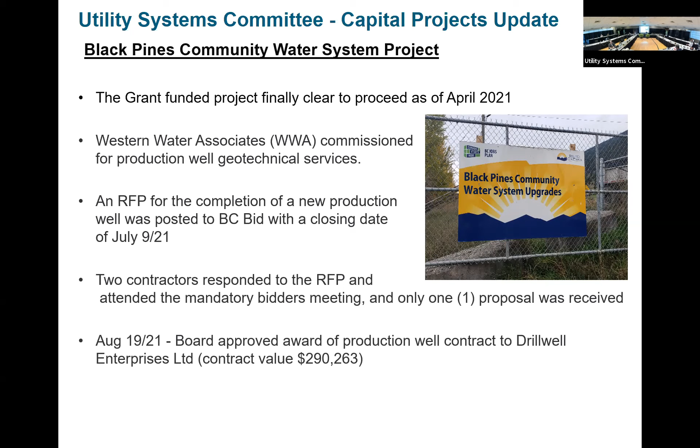And the board approved the drilling contract on August 19th for $290,000 and change. So the gravel pad works, we did some expansion on that working area in behind the transfer station. That was just completed on October 8th. And as we speak, drilling is ongoing on the site. I think we're down between 100 and 200 feet at the moment. And that'll be ongoing with production well testing following the drilling. And we expect that to be completed in November. So it's nice to see this moving here.

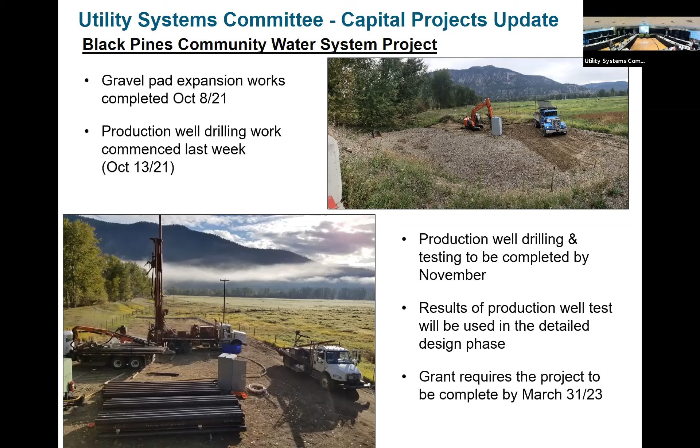Once this is done, we'll use the results of this production well testing to complete the detailed design and then move forward with a construction contract for the rest of the infrastructure. And this entire project needs to be completed by March 31st, 2023. That's the end date for the grant funding program. Any questions on that?

Next big project, of course, water metering program, which we've been working on for a number of years now. This project is nearing completion. Last count, we were at 1,014 out of 1,050 total meters that will be installed. And part of the reason we're not quite there yet is the delivery of the final batch of meters is being delayed as a result of the world microchip shortage that's happened as a result of COVID-19. So it's impacting the supply chain for those specific endpoints that communicate to the cell system.

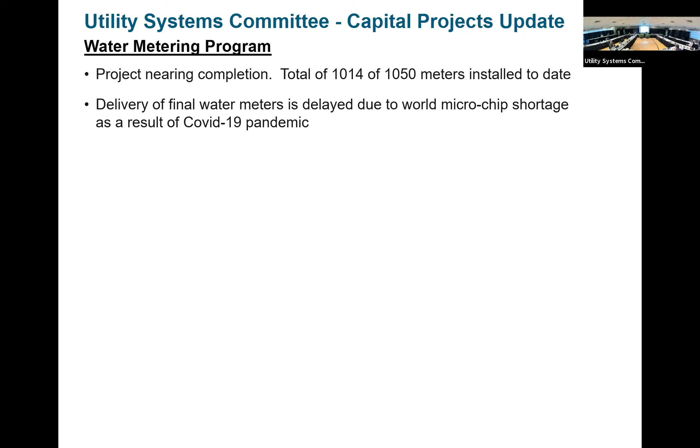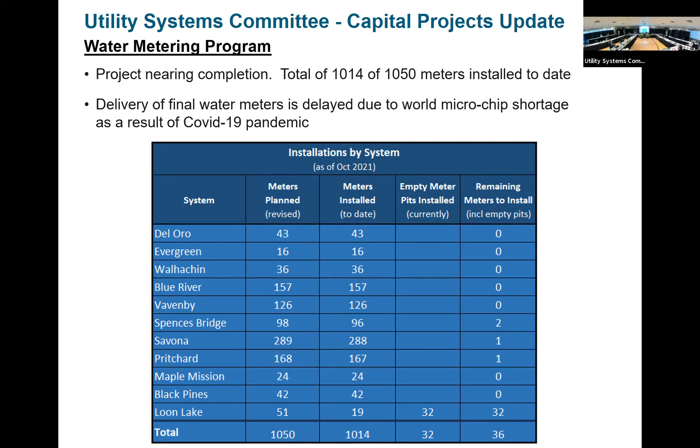This table here summarizes the meters planned. This number is slightly adjusted from the original when we started this project, but it's pretty close. So 1,050 is what we expect at the end here. And we've got 1,014 installed, as I mentioned. There are 32 pits installed in Loon Lake that are just awaiting the meters to be installed. And so those are the majority of the batch that we're waiting on shipment from the factory. I should say the contractor is waiting on. So that's the metering summary.

Good news on this front is the initial strategy, you may recall, I've talked about this in the past, was we had hoped to put about 70% of the water meters in pits at property lines, because that's certainly a preferred location. We don't need to have an appointment with the homeowner to go inside to do the installation, and we can easily access for maintenance or repair. So as the project's gone on, we had a contingency fund in the budget for this project, and things have gone quite smoothly. So we've been able to start digging into that contingency and increase the number of pits that we're installing, because of course the pits cost about 5 times the price of an inside installation.

So, Mr. Devlin, could you answer a question from Bill? Sure, absolutely. Go ahead. Yes, thank you, Chair. I just was wondering on Maple Mission, I see they got 24 out of 24, which is good. Are those all pit type meters? Yes, they are. Thank you. Go ahead. Okay.

So as we've been able to increase the number of pits, we're targeting right now at the end of the project, we'll have 83% of the meters installed in pits or manholes, and only 17% inside. So that's really great news from an operational perspective, certainly.

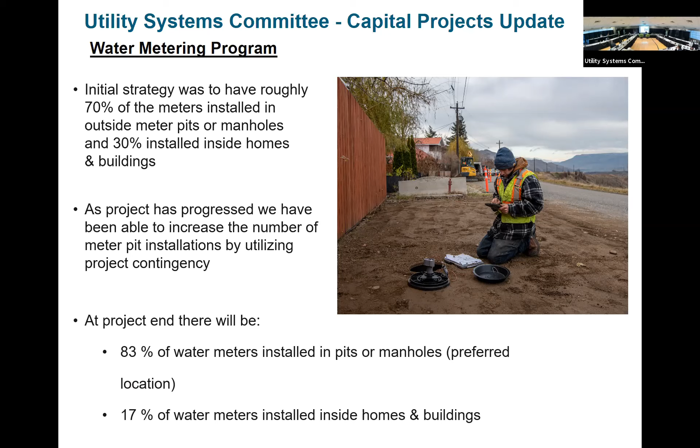The substantial completion date in this contract was June 20 of this year, 2021. Obviously, the pandemic has caused some delays, and as I mentioned, the delivery of the last batch of meters is delayed as well. But the good news is we're a little behind schedule, but we're well under budget. So we're really pleased with how this project has gone.

Mr. Quinn? Thank you, Chair. Through to Jake. Some of these things have got a time frame that they must be completed by. Is the water meter project one of them?

Yes, the completion date in the grant funding program for the water meters is June of next year. Okay. Now there's another, I think it's 6 months after that for us to wrap up the paperwork on the project. Yeah, the question is there's a shortage of chips for the meters at Loon Lake, I think you said. Yes. If that chip shortage shows up, are we going to be able to get an extension for that if needed? We don't anticipate at this point that the delay from the meter delivery will be that significant in terms of pushing us up against that deadline. Thank you.

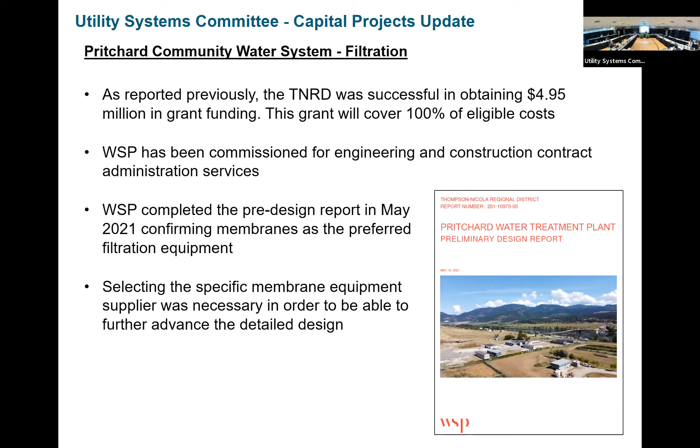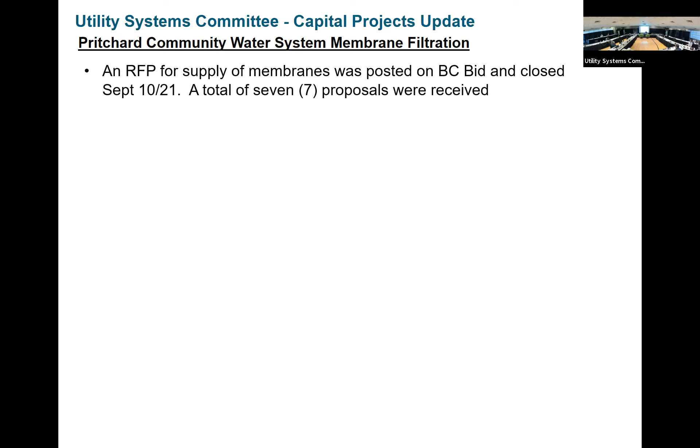So we've issued an RFP, a request for proposals. We put that up on BC Bid, and that closed on September 10th, and we received 7 proposals from that RFP. And again, that's specifically for the membrane equipment that goes inside the facility. So a report is going to the board tomorrow to recommend award of the membrane supply and delivery contract to H2O Innovation for a price of $760,000 and change for that contract. And that's below our budget, by the way, which is great, even with some of the challenges that have happened with construction prices over the last year.

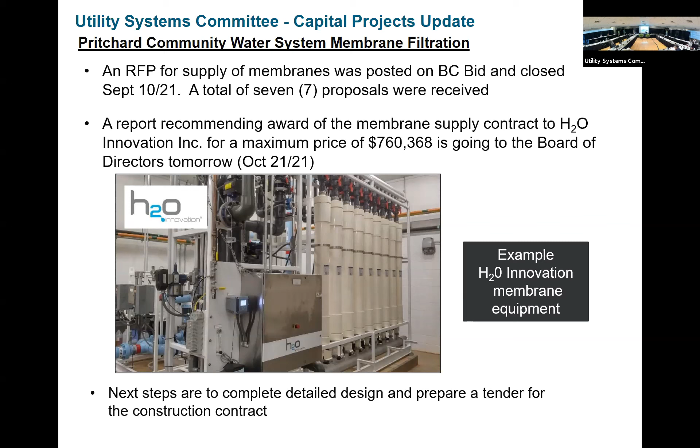So subject to board approval of this contract, we'll be able to proceed and finish the detailed design and issue a tender once the design and drawings are completed, a tender for the actual construction contract. So hopefully we'll have that out early next year. Yes, Director Quinn. Through the chair to Jake. After this filtration is built, is there still a requirement for chlorine? Yes, there is. Thank you. Yep. Really? Any other questions?

Fortunately, we had a dedicated water main up to the reservoir already on this system. So you can think of it as essentially water bypasses out of that main, comes into the plant, gets treated, and then continues on up to the reservoir. So that's worked out well.

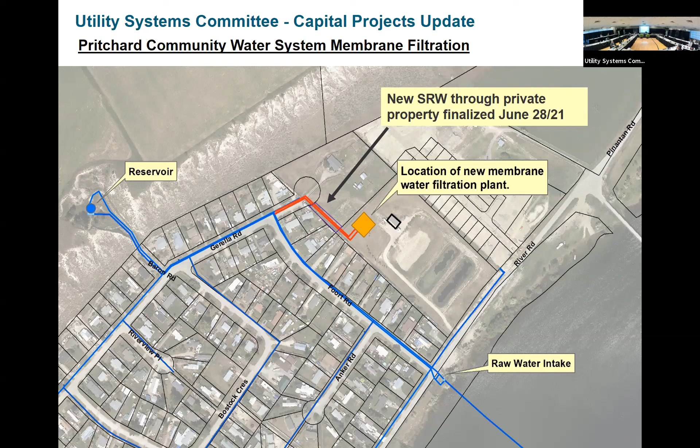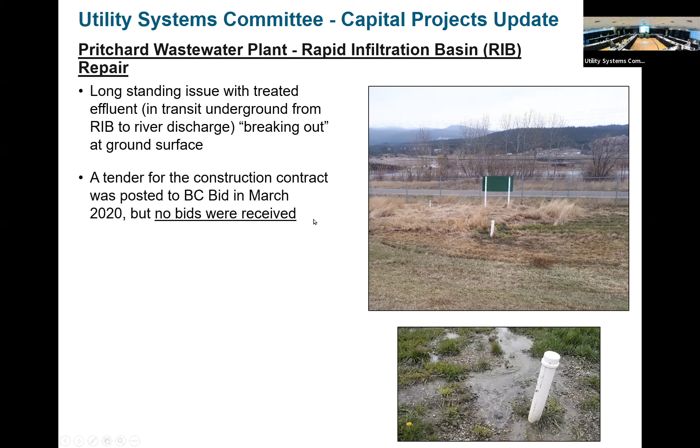So we issued a tender for this in March of this year. We didn't get a single bid. And I know the contractor world was super busy this year. We also had a fairly tight timeline there to do with the riparian area, which I think might have influenced the bidders. So we put it out for tender again in late summer, and we awarded it to True Construction on September 8th for $90,000.

Could you just halt for a minute? Agnes, could you tell me who my vice chair is? Sorry. Director, would you take over for just a minute, please? Okay. Any questions of Jake for this, or you still have more on this slide? Yes. Okay, Jake, go ahead. Finish this slide.

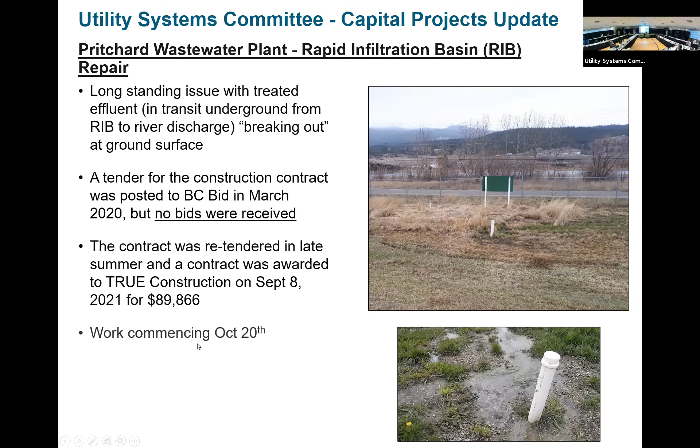So I was hoping to have a couple photos of work commencing on this project. It was supposed to originally start yesterday, but it was bumped to today. So work should be commencing today on site. So good to get this project going.

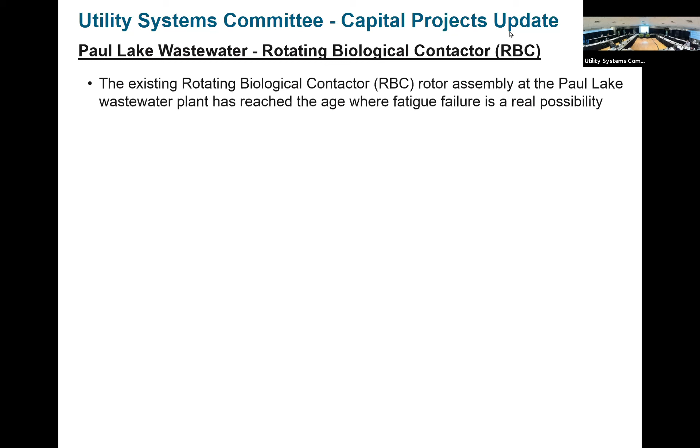Next project, I'm going to hand this over to Tyrone. Thank you. Our next project is Paul Lake Wastewater, rotating biological contactor, RBC. So basically we're preparing for the failure of the existing RBC, which was installed somewhere in 96, 97, and fatigue failure is a real possibility for this. So we went with a contract for supply and delivery of the new RBC with Hannah equipment for $125,000 roughly, and it was delivered on site September 21st, 2021.

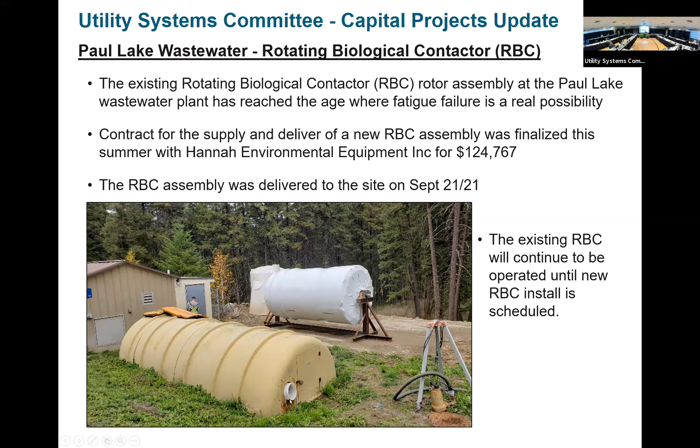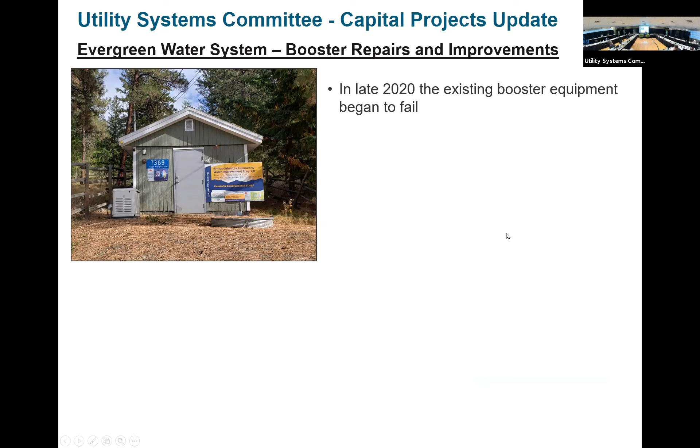The next project is the Evergreen water system booster system repairs and improvements. So in late 2020, our staff noticed that our booster equipment began to fail. We used to have a large hydropneumatic tank in this building, and it was starting to weep in various areas. And so the board approved $157,000 in gas tax for the repairs. We commissioned True Consulting to complete detailed design of this, as well as contract admin.

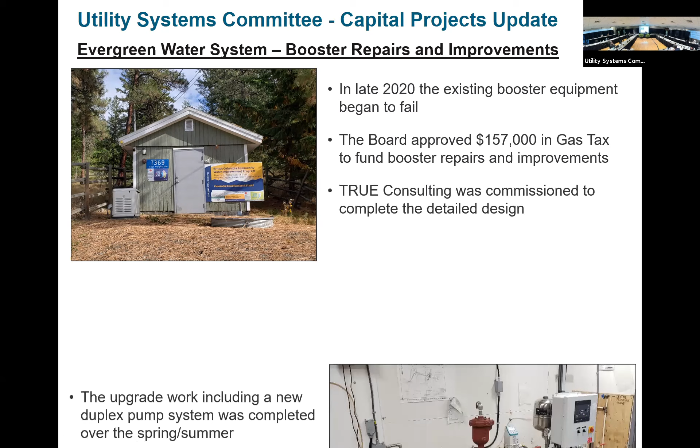And the upgraded works include a duplex pump system. So you can see this really small skid, actually, 2 small pumps and a control panel, plus our new master control panel, which aren't in this picture, replaced a hydropneumatic tank that was approximately 20 feet long by 6 feet in diameter, horizontally laid out in this building. So we have enough room in this building now for a couple pool tables. Not that we'd ever put them in there, but there's a significant amount of space and we're looking at different uses for that space right now. And this replaces that failing system. I'll talk a bit more about this project and some of the operational benefits in the operations update.

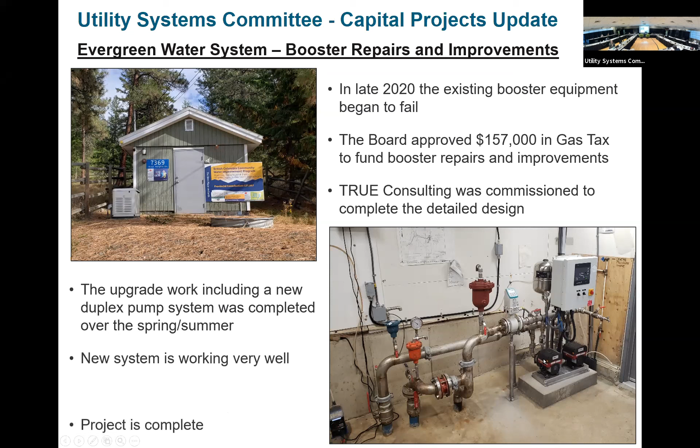This project is complete and it's working quite well. Next project is the Blue River water system. So we have 2 groundwater wells and no disinfection at this point. We received new conditions on our operating permit from Interior Health that required us to complete the 5 recommendations that came out of the GARP assessment, or groundwater at risk of pathogens assessment.

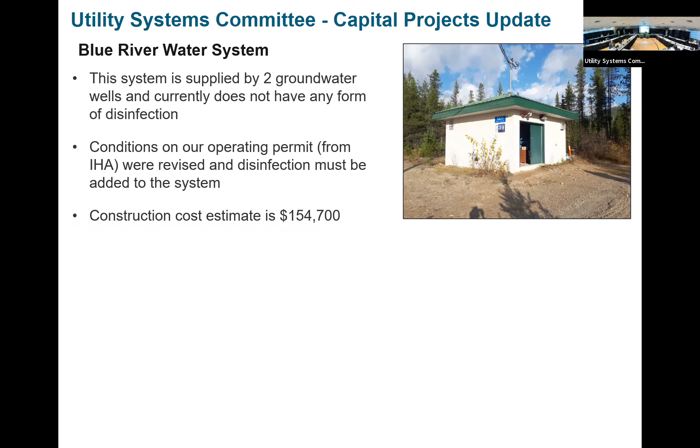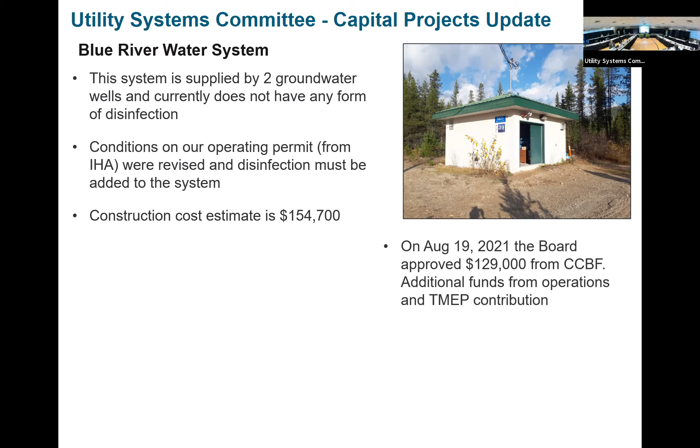So the main one that's outstanding is to install disinfection, and the estimated cost at this point is $154,700. On August 19th, the board approved $129,000 from the CCBF, and the additional funds for this will come from the operations surplus as well as the Trans Mountain contributions.

We held an open house in Blue River on October 6th, 2021. It was fairly well attended by the community. And these upgrades, according to our conditions on permit from Interior Health, must be completed by July 2022. Any questions on Blue River?

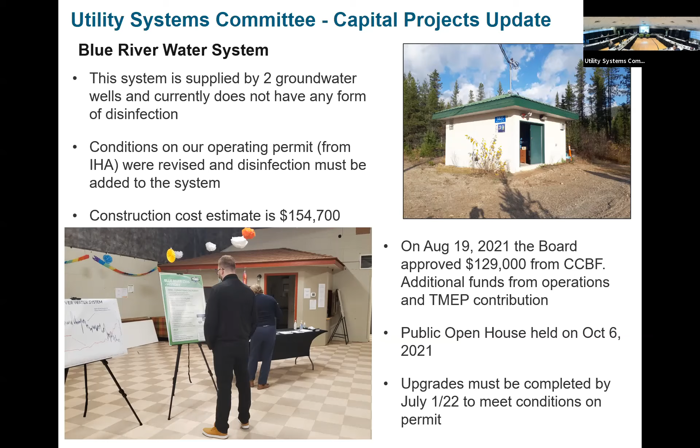Did the people agree? A significant number that attended the meeting didn't. And they're going to take it back. So I imagine they'll be coming as a delegation at some point in time and all those kinds of neat things. I've looked at the list of people attending, and there was about 12 people out of 150 some odd connections that opposed it. Yeah, so it was well attended and there was a lot of discussion. It didn't beat us up too bad. Any other questions on Blue River?

Okay. Moving on to Vavenby Community Water System. So we received a land donation from Mr. Brian Fehr, 1.5 acres, where the old Canfor site was, the former sawmill site in Vavenby, designated for a community water treatment facility. A thank you letter was sent on May 2nd from the board to Mr. Fehr. And then we are also working on acquiring a statutory right-of-way through the adjacent Petrocan site for a future water main. This would allow us to see hydraulic improvements on the pipelines as well as loop a portion of the system.

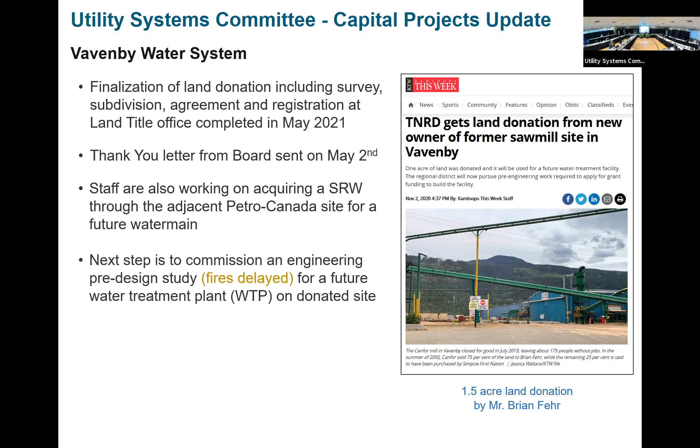Within Vavenby, the next step, which has been delayed due to the fire season, was to commission a preliminary design for this to prepare for a grant program. So our funding sources for this preliminary design are the Trans Mountain Expansion Project funds, as well as the Canfor Legacy donations. And the land costs, yes, they'll cover that. So preliminary design will provide the scope and costs and details for the future grant application.

Tyrone, why would the fire season delay an engineering project? Short answer, staff require time to get the RFP out for the preliminary design to the contractors to bid on it. And we didn't have the time with the fire season as we were tied up with the EOC. Oh, yeah, okay. So it was on our end. Okay, thank you.

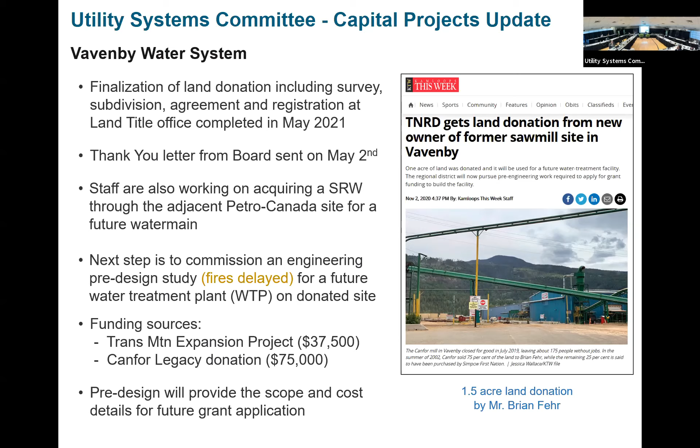So our next one, Savannah Community Water System. We submitted the RNC grant application for the water treatment in October of 2020, and we asked for $9.14 million. This was the 100% eligible costs program. And on August 28th, 2021, we received notice that our application was not successful. So this project is going to stay on our list for possible future grant program applications. If any of the grant applications require the local government portion, we will require public assent prior to submitting for that grant.

I'll just give you a bit of an update on that. I was at a public meeting last night, nothing to do with the water system, however, I did bring up the fact that we'd been turned down and asked what they wanted to do. And they said they do not want to borrow any more money against their taxes on anything to do with water. So I'm assuming that we won't be going to public assent for anything until somebody forces us to do so. Okay.

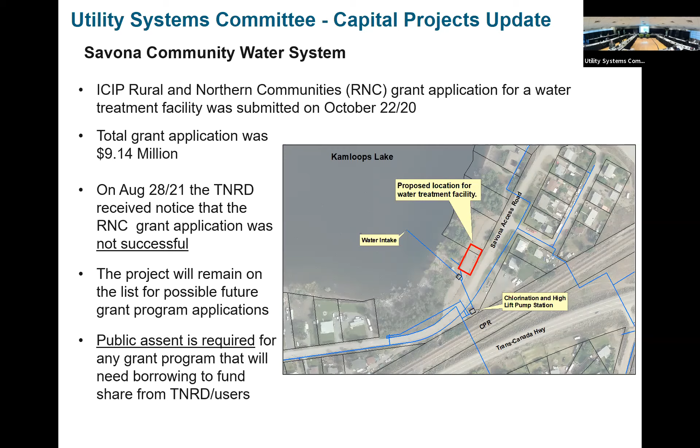As far as this filtration project goes, for our preliminary design, we've secured some property where our current intake is. We've also secured the property across the highway for disposal of residuals. So it's basically on the shelf now, waiting for a grant program. That was it. Any questions on the capital projects updates? Sorry. Oh, okay. Any questions? No. Okay.

Just wondering, Tyrone, what's the total projected cost for the Vavenby project? So at this point, our estimated cost for just preliminary design is we're earmarking around $75,000 for that. As far as a total project cost, we don't have an estimate for that at this point. Can you give me a ballpark? Any idea? 6, 7. Yeah, 6 or 7 million, somewhere in there. Thank you. We could be off by 6 or 7 million as well.

I understand that. I just built a shop. Okay.

All right, I'll turn it over to Jake for the next presentation. Number 2, yeah. So let me try it. Yeah, we got to close the other one. Stop sharing. Great.

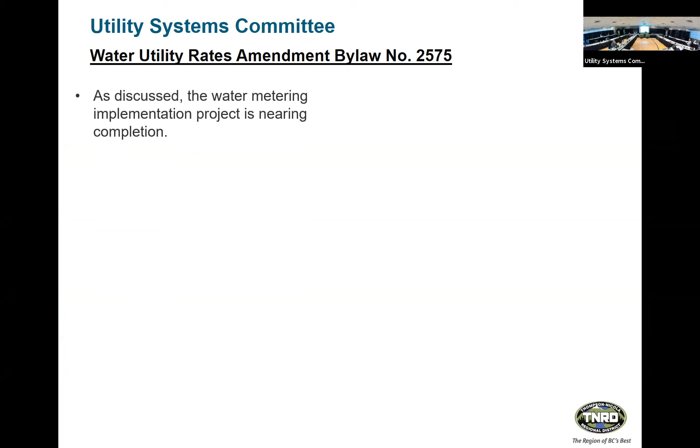Okay, as I mentioned in the capital projects slides, with the water meter project just about complete, it's time for us to update our water utility rates bylaw. This report has a recommendation at the end of it in terms of bringing the draft bylaw forward. As I mentioned, the existing rates bylaw actually expires at the end of December this year. So the timing coincides well with the completion of our water metering project in terms of creating new rates to go along with the water meters themselves.

In terms of how we can structure the metered rates, there's quite a variety of options available. The most common ones are constant rates, what's called a humpback block rate structure, declining block rate structure, and inclining block rates, which is the most common. Essentially, with inclining block, there's thresholds. As you use more, you can potentially pay more per unit of water consumed.

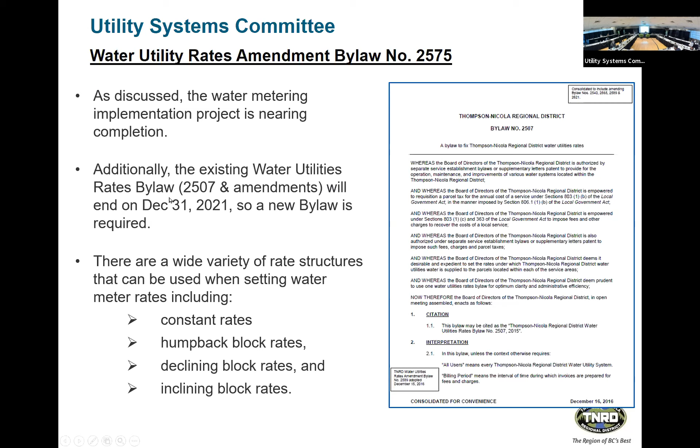So we've taken an extensive analysis to come up with rates for each of the water systems. I've actually been working on this for probably close to 2 years. It's been a major undertaking from an analytical perspective, complicated by the fact that everything we did was done 11 times over. So it's been a significant body of work to get to this point. We also commissioned assistance from 2 independent consulting experts who focus on rate setting as part of their area of strength.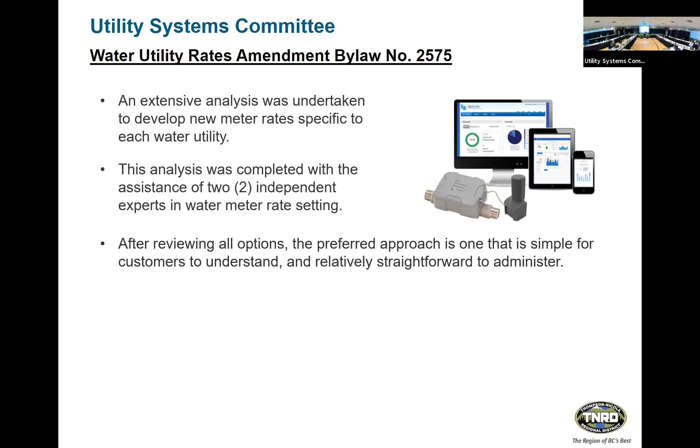And after looking at all options, we decided to go with an option that was simple for the customers to understand and relatively straightforward for us to administer. And of course, having 11 separate utilities is also a consideration there in terms of trying to keep it straightforward.

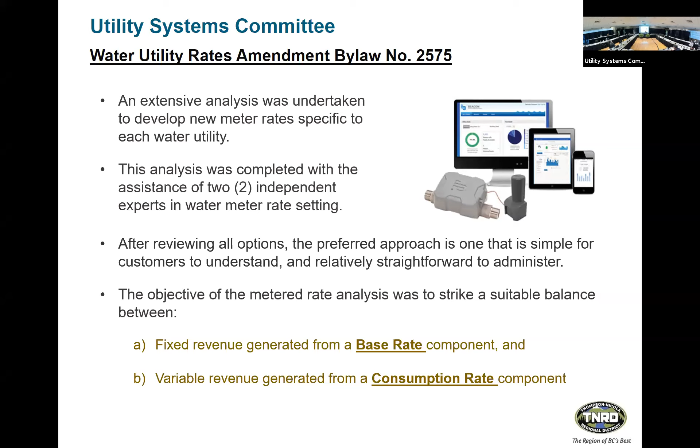When we looked at how to structure the rates, we were looking to strike a reasonable balance between fixed revenue, which is generated from a base rate component, and variable revenue, which is generated from a consumption rate, based on how much water an individual customer uses. Pretty much universally, where water meters are used in billing for a water utility, this is the approach. There's two components to the bill for each customer. The metered rate is the sum of the base rate component and the consumption rate component, and those combine to give us the bill that goes to the customer.

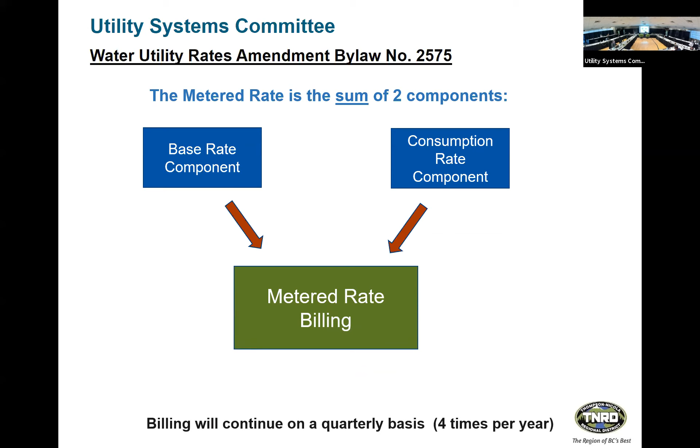Just a note that we're going to continue billing on a quarterly basis as we are doing now, so no change in that regard. So in looking at the actual base rate component... Sorry, I have a question. Absolutely. Is the base rate basically the same as what they pay now on the monthly that they're billed through the regional district? No, it's different. I'll give you the specifics for each system as we go. So when we struck the base rate originally, we struck it on how much the consumption was within that water system. That surely hasn't changed that much that we have to change the base rate.

Without a meter in place, we've used what we call a flat rate, which looks a bit like a base rate, but the base rate is only part of a metered rate, where the flat rate is a fixed amount per quarter, with no information at all about the amount of water being used. But what I'm getting at is how much different is that base rate going to be against the flat rate? Like, is it gonna go up? Is it very significantly different? So in the entire analysis to set these rates, the objective has been that we generate the same amount of revenue in a year as we do now.

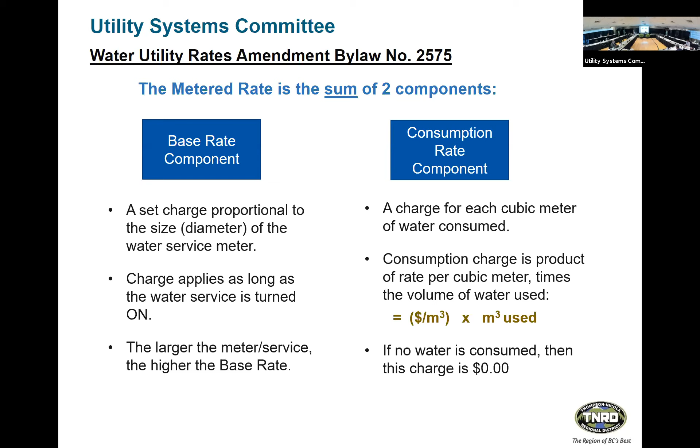There's 220 imperial gallons in a cubic meter, and there's 264.2 US gallons in a cubic meter. Imperial 220. Skill testing question.

So if you can see it on the bottom of the slide there, the base rate component, this is fixed revenue that we know. We know the size of the meters that went in. We know how many of each of the sizes we have. And so there's known revenue for each utility based on the base rate component. Conversely, the consumption rate, that's an unknown for us. We have a reasonable estimate.

Sorry, go ahead. Can you wait half a minute about the larger meter service? One of the things I'd like to ask is when we've got a meter service at 50 millimeters, which I figured out as 2 inches. 2 inches, yeah. And the rest are 1 or 3/4. Can we not change that 2-inch line? And the reason I'm asking that is that there's 4 pieces of property that belong to the community association.

One of them is a 2-inch line, and I have no idea why I would have put a 2-inch line in there to start with. But because of the cost of this metering service at 2 inches against the other ones, is there some way that we can change that down to a 19 millimeter?

The answer to that is sometimes yes, sometimes no. It sort of depends on the size of the actual pipe that the meter is installed on. It's common for us to put one size smaller meter. So say, for example, you had a 2-inch water line. It's common for us to then put a 1.5-inch water meter on it.

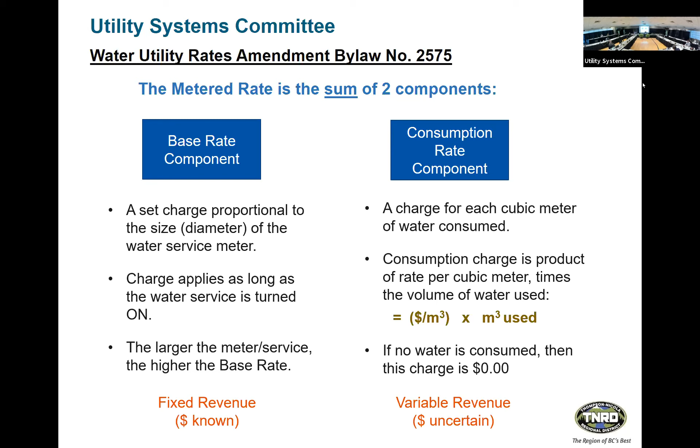Of course. And there is an exception to that, and that's Loon Lake. Loon Lake still has a partial charge when the water is off because there's so few customers and the system literally cannot afford to operate with the high number of seasonal customers on that system. Any more questions? Thank you, Mr. Devlin.

Okay, so these are the numbers that are in the draft bylaw for each system. So all 11 water systems here, and the base rate component by meter size. The numbers you see in bold also indicate whether or not there are meters of that size on that system. So Black Pines, for example, we've got 19 millimeter meters and 25 millimeter meters bolded. So those are the only 2 sizes of meters on that system. By far and away, the majority of all the meters on all our systems are 3/4 inch or 19 millimeters, 90% in fact.

So Savona definitely has some larger meters. You can see you have meters up to a 2-inch in Savona, so nothing bigger than that based on this data. So the base rate component, as I mentioned, as long as the water service is turned on, this is the rate that applies per quarter. And this table may not look like much, but an incredible amount of work has gone in to come to these figures on all 11 systems.

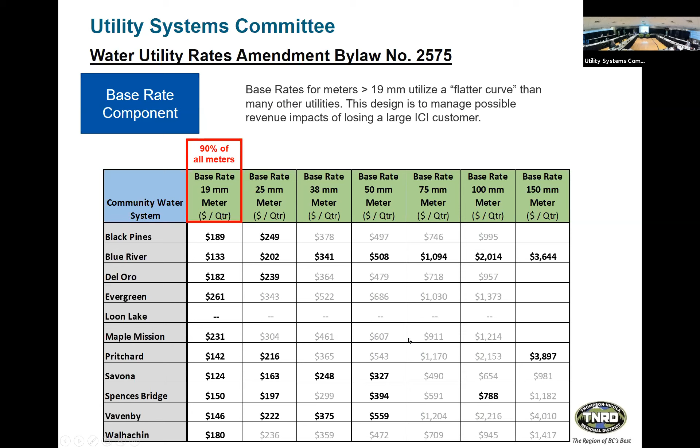Okay, consumption rate component. So as I mentioned before, we wanted to try to keep this simple for customers to understand, not complicated for us to administer, particularly because we're running 11 systems and our finance department has to do each of these individually. So we're proposing a 2-block consumption rate structure. However, we're also recommending that 9 of the 11 water systems actually have the same charge for block 1 and block 2 at this point in time.

Now that can be changed down the road in the future, but to help keep things simpler for the customer to understand and for us to monitor and provide information to the customers in terms of this is what your bill is going to look like through the mock billing, they will be informed what their charges will look like at the end of the mock billing phase when we actually implement meter charges. Makes it easy for that discussion with the customer in terms of, well, you've used this amount of water, this is the charge per cubic meter, and that's your consumption rate.

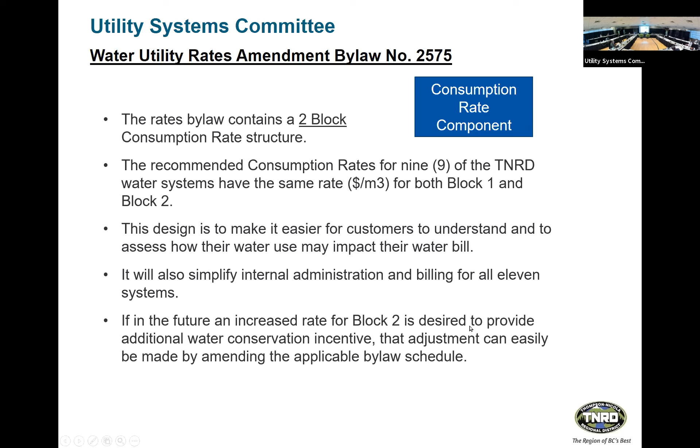So there's 2 exceptions to that because of course we have 11 water systems and I'm recommending that 9 have the same charge for block 1 and block 2. Makes it easier for administration and billing. So in the future, if we wanted to increase the rate in block 2 as an added incentive for conservation, for customers to be more aware that as they start using more water, they'll pay more, we could easily amend the schedule in the bylaw to make that change.

So here's the nuts and bolts of our proposed consumption rates for each utility. The shaded 2, Black Pines and Del Oro, are the 2 exceptions where we've applied a different rate in block 1 than block 2, and it's inclining, so it's a higher rate in block 2. The other 9 systems all have the same rate in block 1 and block 2, for simplicity and ease of administration at this point in time. May I ask what the difference between Black Pines and Del Oro would be against the other systems?

Yes, good question. So Black Pines is the exception in terms of water metering. Black Pines has had meters since I believe the TNRD took it over, a long period of time. So the customers there have been charged a metered rate, and they actually currently have a 4-block system. It's quite complicated and certainly not something we would want to manage 11 times over. So we're simplifying it to make it consistent with the other 10 utilities, but they're already used to paying more if they go above a certain threshold. So to be consistent, we're recommending a continuation of an increase as they go into block 2.

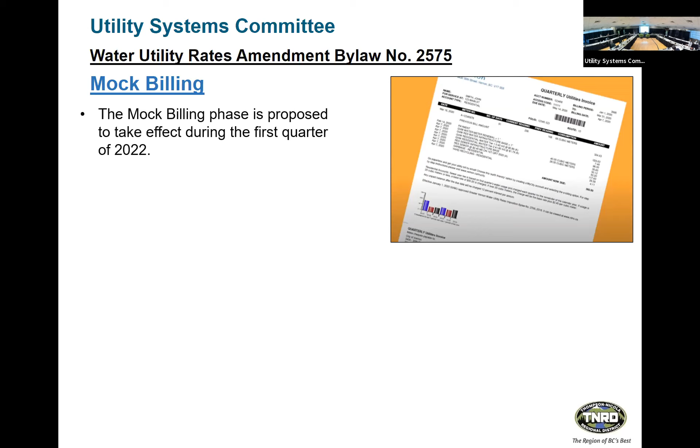Okay, mock billing. So, of course, we're going to get this bylaw hopefully to the board here in November, and we'll have it in place for January 1st. And we're proposing to commence mock billing first quarter of 2022. So as I mentioned, the exception here is Loon Lake because we don't have meters there yet. Hopefully soon, hopefully within weeks.

But as mentioned, we're proposing to continue mock billing for 4 consecutive quarters. So for customers that, as a vast majority of the customers have meters now, their mock billing will be the 4 cycles of 2022. We're obviously going to have some exceptions in Loon Lake, and then there's a couple other stragglers that will lag behind that.

Director Quinn. Thank you. Now's the time for the magic question. So the homeowner's going to get 2 bills, a mock one and one that he pays. Correct. What if the mock one's cheaper? Does he get, don't laugh. They'll be happy because in 2023, they'll save money. The question is, are they going to be knocking on the door saying, I want to pay this amount, not this one? Well, they may ask. Because I think that's happened in other places. Yes. That's why I asked that magic question. No, I'm sure that question and the question about, can I have a smaller meter? Yeah.

So obviously the mock billing will inform the customer about their actual water use and how the rate structure would impact their billing after meter billing takes effect. And the regular billing will continue through the cycles of mock billing as before. So the revised bylaw attached in the agenda, you'll see the schedules are quite long, and that's because we've had to essentially retain the old rate structure and add the metered rate structure. So we have both in each schedule for each utility. So that's why that amending bylaw is quite long in terms of number of pages.

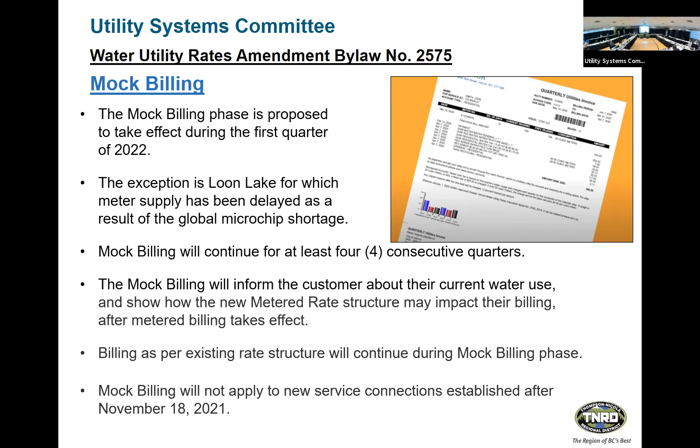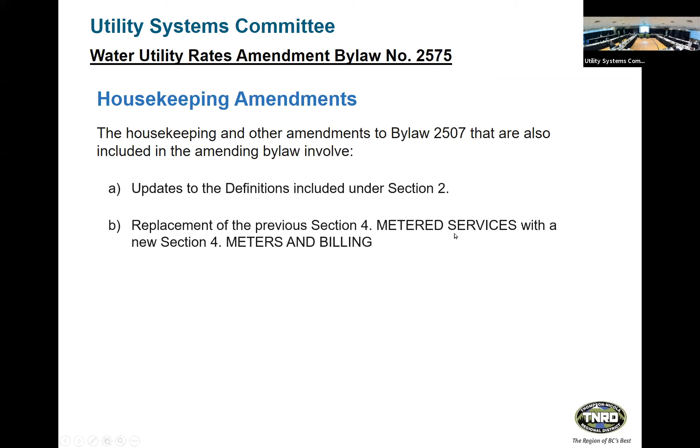There's several other housekeeping amendments in the amending bylaw, some updated definitions, which you can look at if you want. I'm not going to get into the details. They're pretty minor in nature. Some additional information in terms of what was under section 4 of metered services, and we've renamed it meters and billing. And we've updated some of the costs that were in Schedule A. Schedule A charges apply to everyone, where Schedule B's B1 to B11 are unique to each system. Schedule A charges are the same for all water systems.

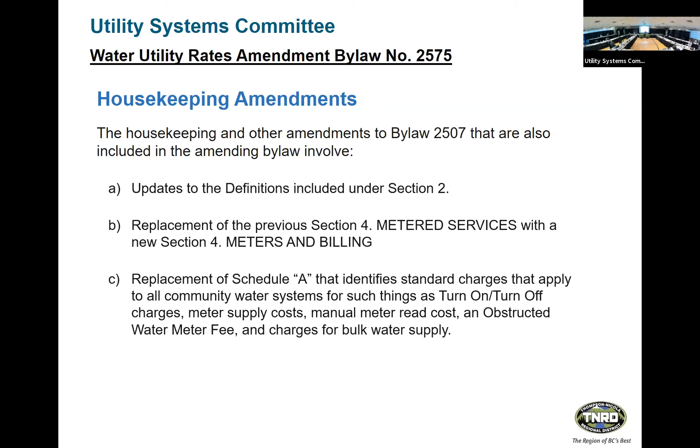So if you call us up and say, turn my water off, then this charge is the same in Blue River as it is in Vavenby or anywhere else. So those are kind of universal charges in Schedule A. And that's it for the housekeeping amendments, and that's the recommendation.

Okay, we have a recommendation before us. Moved by Director Quinn, seconded by Director Smith. Oh, Director Barbara, go ahead. Hello. Just a question.

Just as people might come in and say my mock bill is cheaper than what I'm actually paying at the moment, what happens if someone comes in and goes, holy cow, look at what I'm paying right now, and look how much more I'll be paying under the water meter system? Is there any plan to, like, any way to work with them to say, okay, here's how you can reduce your water consumption? Just wondering if that might happen.

Well, we're certainly happy to work with customers to see if there's opportunities for them to reduce consumption. And of course, the question about maybe reducing the size of their meter, if that's something that works in terms of their individual property. We wouldn't be proposing to go back and revisit amending the bylaw rates, because it's a given that some people will pay less and some people will pay more. And that's the experience in every municipality or local government that's gone from a flat rate billing structure to a metered rate structure. So, does that answer your question, Director Roden?

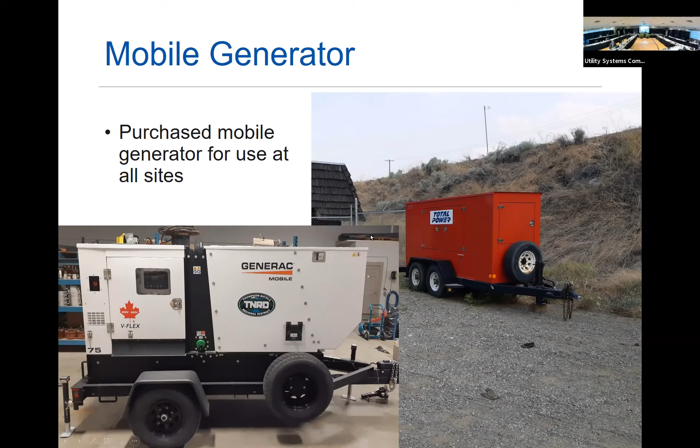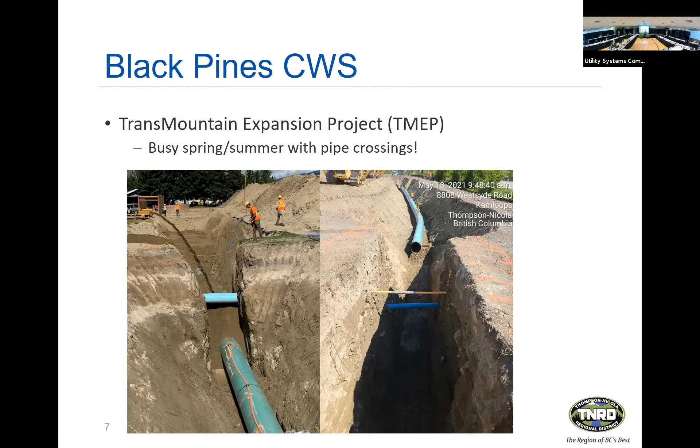So our community water system highlights start with Black Pines. So aside from our groundwater well and that project, Trans Mountain, the expansion project, has been pretty busy crossing all of our infrastructure in Black Pines. I just threw some pictures up here. You can see the Trans Mountain line coming across one of our water mains, as well as another water main and road crossing here. So liaising and coordinating with their ground disturbance crews on going through our agreement with Trans Mountain as far as setbacks and whatnot took up a fair bit of time this spring and summer.

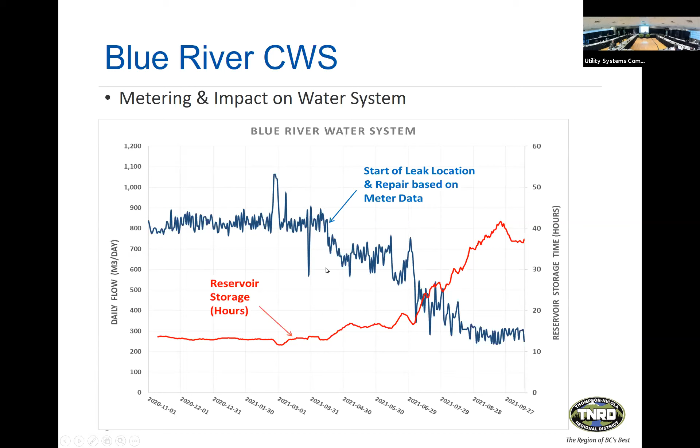So we're going to remove this filtration system, and we're going to assess the effectiveness of this filtration system for all of our other sites, with the idea that we could reuse it somewhere else. But that frees up a fair bit of space where we can contain our chlorination. So we can keep all the chlorine fumes away from all the electronics and the wet areas. And it just extends the lifespan of all the equipment in the system. So I wanted to touch on that briefly.

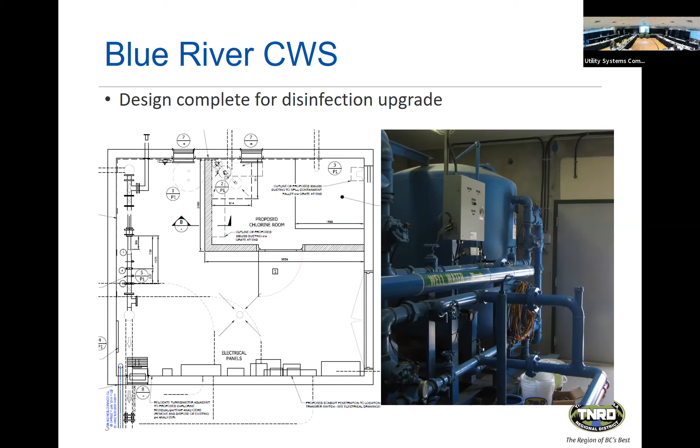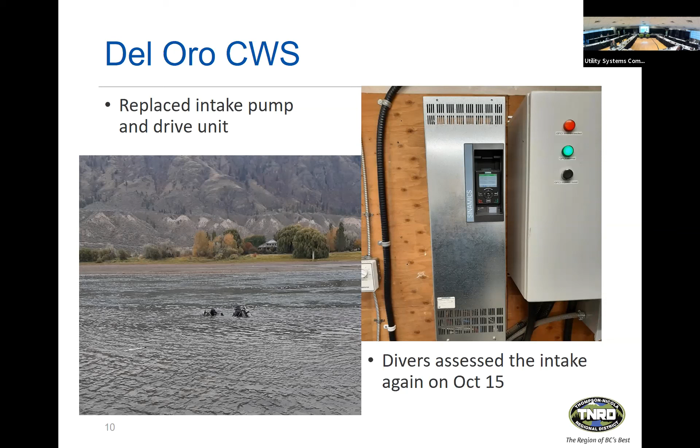So moving on to Evergreen. So we still have some challenges with access to our water intake in Evergreen. We do have to travel through private property of a person who is not within the community water system to access our intake. Our negotiations to date have been unsuccessful. So we're examining our other options for that. We've completed the booster station upgrade. One of the advantages we have now is that we can actually control our pumps at the intake.

So the intake sits on the banks of the North Thompson River and is separated from the community by a railway and the highway. So we have to cross the railway and the highway, and then we pump the water up to the reservoir. And then we have a couple of customers on the system that are at an elevation so similar to the reservoir that we actually have to boost the pressure from the reservoir out to the system so they have adequate pressure at their homes.

So in the original system, pre-upgrade, we had to actually physically visit the intake down on the river and cross the highway and the tracks and private property without a right of way or an easement to go to it, if a pump failed, or just to even assess how the pumps were operating. Now all the data from the pumps is brought up to the booster station and then sent to our TNRD regional SCADA system.

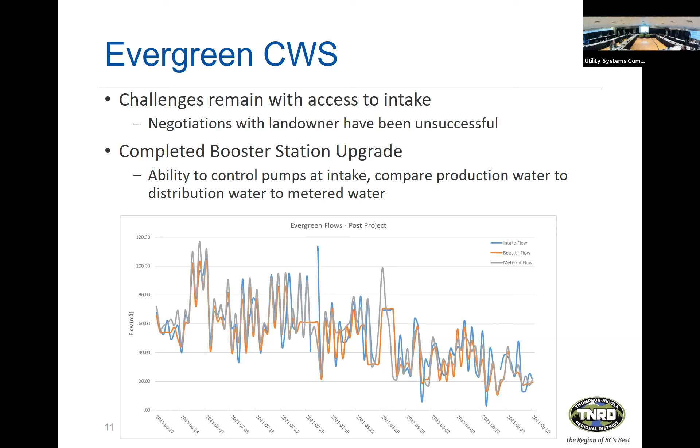Loon Lake. I know I said water system highlights and left the challenges for the wastewater, but we do have challenges in Loon Lake as well with our water quality that we've heard about at our previous committee meetings as well as board meetings. We do receive multiple customer complaints throughout the year, and we did install an automated flushing unit. This system at Loon Lake has minimal looping in it, so it has quite a few dead ends on the system.

So basically our idea with the flushing unit was to try one dead end in the primary one and see how effective the flushing unit was in reducing customer complaints and/or manual intervention. So our operator up in Loon Lake this year observed during his flushing that it only took them a couple minutes to flush that line to clear it out versus the 15 to 20 minutes it used to take them to flush it.

So with all this, we intend to try and develop a more proactive or predictive flushing program to reduce the amount of customer complaints as an interim solution prior to a permanent filtration system solution. So this picture here is a picture a resident sent us of their water coming out of their tap. So with the iron and manganese in the water reacting with the chlorine and the amount of time it sits in the system, it will react and discolor the water.

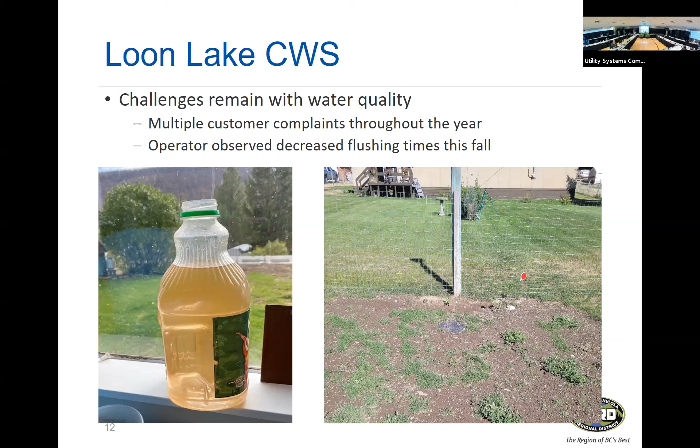Maple Mission community system. So similar to what we did in Blue River a couple of years back with the groundwater at risk of containing pathogens assessment, we're actually kicking that one off this week, tomorrow actually. And this is to satisfy the source water assessment requirement in the conditions of permit from Interior Health. This system's already chlorinated and has received multiple upgrades to address some of these issues. So this is just to see what kind of condition the well is in, as well as what type of risks are there, and if we've missed anything on it.

This fall we completed a standpipe repair. So the standpipe is in the picture on the right here. This is what our standpipe looks like. Lots of people call them hydrants. But the majority of these standpipes were originally installed with a PVC elbow at the bottom connecting to the water main. So there was an incident a few years ago where one of those plastic elbows cracked and drained the entire reservoir.

So we've been methodically going through and replacing the PVC elbows with a brass elbow, and the rest of the pipeline and the connection to the water main that way. Director Kershaw. Yes, thank you, Chair. Is that pretty well completed now? We've done most of those elbows out? We have one left, I believe. One left? Thank you.

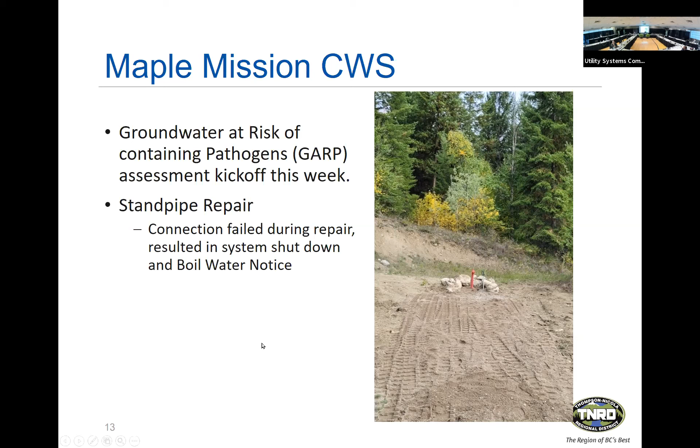Savona. So our grant application was unsuccessful, and then we put a new service line in underneath the access road. So we've gone towards directional drilling to install service lines when the water main is on the opposite side of the road from the water service request. And so this is a picture of, on the left, the mini excavator that we have, and we dig a pit here. And then on the opposite side of the road where the curb stop is installed, the drill will sit and they'll drill underneath the road, install a casing, and then we'll pull our service lines through there, make the connections to the water main, establish a curb stop, and the customers are able now to connect to the system. So again, these are new connections to the system.

They also have meter pits for them, and or inside meters when they go to build and apply for their building permits. But this project is actually paid for by the customer who requests the water service. So unfortunately, some customers have to cross the road, and others are adjacent to the road, and we can just put a curb stop right here. And we've had this same situation in Blue River and elsewhere. Ministry of Transport prefers that a trenchless technology is used to cross a road versus an open cut. Open cut is the absolute last resort. So if you can't drill it, then you can open cut it.

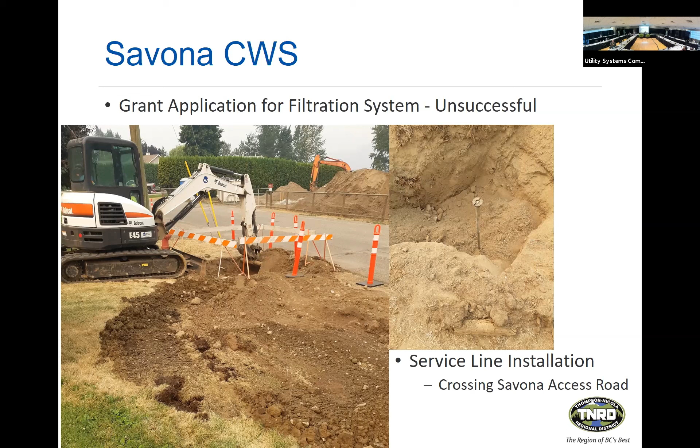Moving on to Spence's Bridge. One of the projects we've had for Spence's Bridge was to update the SCADA system. SCADA is a supervisory control and data acquisition system. It basically takes all the data from all the sensors in the system and brings it to one spot. Spence's Bridge was operating a standalone SCADA system, which required a standalone server actually in the water building, and that requires more maintenance and operation and updates. So what we did was we proposed that we tie it into the regional SCADA system that we're using. It's a work in progress, but this is what our initial screens are looking like.

So we have our reservoir levels for IR1 as well as the Spence's Bridge community system, our flow rates, our set points, our volumes for today, yesterday, lifetime, pressures on the wells and levels on the wells for now. There's also alarming and stuff. I've been working on this for a few weeks. It's more of a winter project to finish this one up. As part of the upgrade, we installed our VPN appliance to connect it to our regional system, which is on a server in the main office on Victoria Street, which is, fortunately for us, handled by our IT department. So that removes the utility group from having to maintain an IT function.

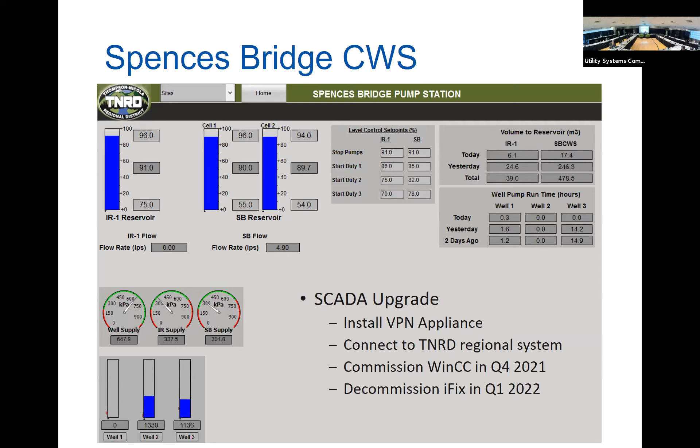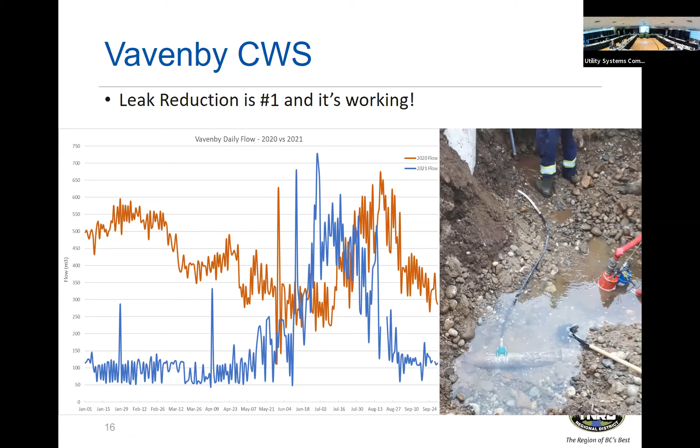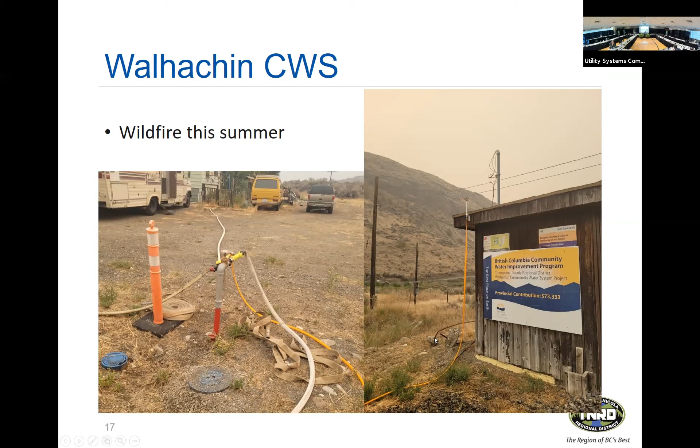So I actually drove out there a few times when we delivered a generator this year. Two of us went out there and dropped it off. I think we left around 1 a.m., but when the fire was starting to come over the hill towards it, it was unbelievable the amount of effort and the work that the BC Wildfire and their fire departments were doing out there to protect the structures and everything else. And the communication was great with them as far as accessing utilities for water and everything else. So just wanted to put that up here because it could have been a pretty significant issue for Walhachin getting cut off by the bridge there. So

Moving on to the wastewater system challenges. So Paul Lake Wastewater, now that we have a spare RBC sitting by, our issues have migrated down to the lift station. So the Paul Lake Community Sewer System collects wastewater from all the homes, which is a discharge from their actual septic tanks. So the sludge or the heavier, larger materials actually stay in the septic tanks and are pumped out by the TNRD on a rotation of 3 to 5 years. The clear liquid enters our lift station and is then pumped to our wastewater treatment plant.

In September this year, we actually had a pump failure on there, which seemed to be caused by a power outage. So it caused the controls on that pump system to fail. And there was also a communication failure. So nobody was notified of this. The alarming system did not work as the TELUS phone line was down. So it resulted in a spill, which was reported to Ministry of Environment and the spill reporting hotline. Fortunately for us, it did not reach Paul Lake.

Our staff like to joke that we're happy how they plow roads in Paul Lake because they make large gravel windrows with the plows, which prevented this. It caused it to pool on the shoulder against that windrow versus creating a creek and a stream right across into Paul Lake. Either way, it is a risk for the department and the organization.

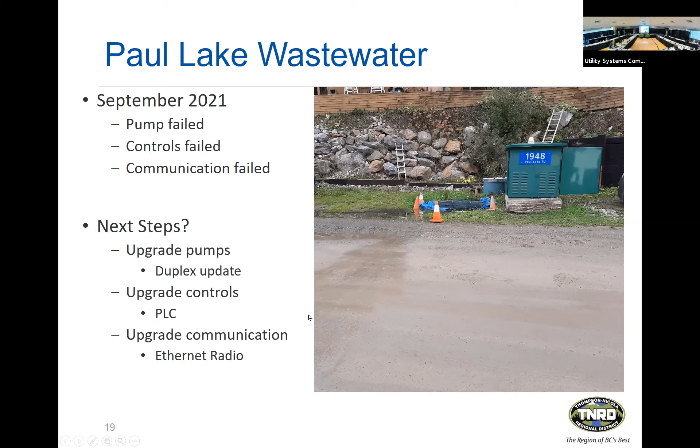What's next for the department here? So backup power. Now that we have our mobile generator, we need to figure out how we're going to connect it to our existing sites. So we do have some utilities that have automatic transfer switches or manual transfer switches. And then it's a matter of actually physically connecting to those. That's in the works right now with our electrical FSR.

Water metering, we have our outstanding installations to complete. As Jake mentioned, we have a shortage of the endpoints, and then we can complete the installations in Loon Lake. But we also have some stragglers that were missed appointments, unable to install, which we have to go through and complete those.

And then, as we demonstrated in both Blue River and Vavenby, we are going to continue to utilize this data to identify the system leakage. The system leakage is both public and private side. Private side is easily identified with the meters. Once those are complete and every connection is metered, now we can start to look at the public side leakage. So what's between basically the source water, the wells or the intake and the customer connections, and start to assess those and repair those.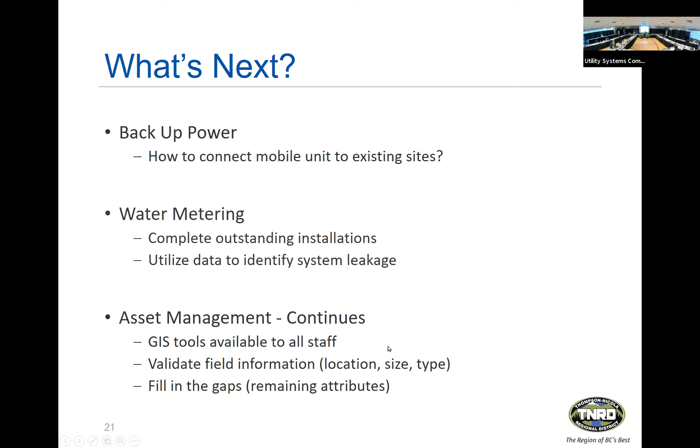Any questions? Mr. Kershaw? Yes, thank you, Chair. I'd like to ask about the Little Fork community water system for the hall there. Is it up and working properly now? We're going to have a meeting there tonight, so I don't need to be blindsided by something that was missed here.

Yes. So the Little Fork Community Hall, the water system upgrade is complete. We have our operator from Vavenby actually visiting it twice per month and collecting the water samples. We're submitting those samples to Interior Health. We've submitted an emergency response plan to Interior Health, and we are now waiting on the results of those water samples to remove the boil water notice at the community hall.

Yeah. And when do you think that boil order might be removed? I don't know. My goal is before Christmas. So it's a matter of contacting Interior Health and getting the right contact there. Our small system drinking water officers have just returned from their mat leaves, and they've been back for a couple of weeks now. So this is an item to bring up with them once they get caught up. And yeah, I know that would make them very happy. They would, yes.

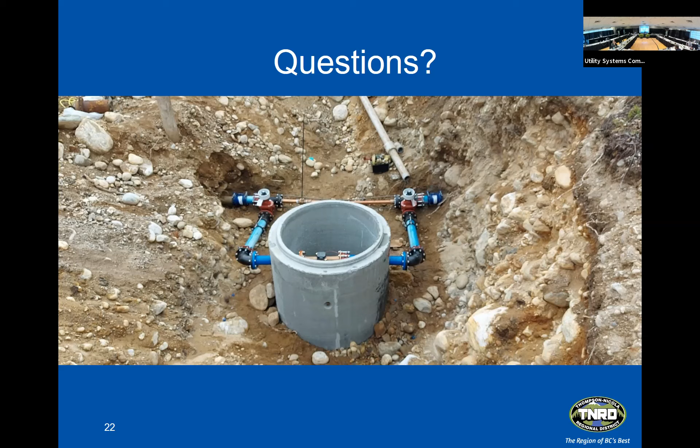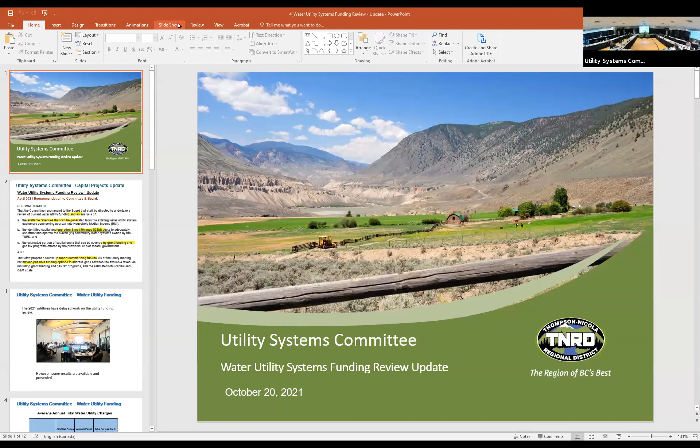Jake, are you going to tell us how badly financed we are? Yeah, I can't say this is the best for last, unfortunately. Okay. Maybe with the screen share here. Let me stick with us for a second. Number 4. Yep. Yep. Okay, last presentation.

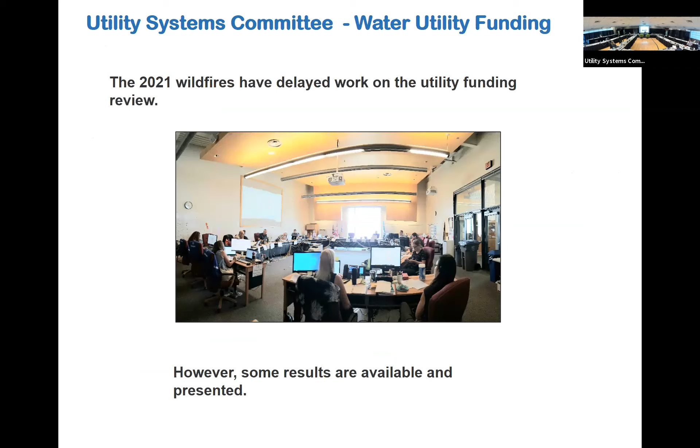This one is on utility systems funding review. The committee will recall in April, we brought forward a recommendation to the committee and subsequently to the board that we undertake a review of essentially the financing for all our water utilities, looking at operation and maintenance costs, grant funding programs, and summarize the results and look at possible options to address the funding gap, which we kind of all intuitively know exists. But I've got some details here now. We didn't get this progressed as far as I'd originally hoped because we did spend a lot of time in the EOC this summer, but I do have results to share.

This table is just a summary of what the average customer is paying on each system through a given year. Now, of course, they're paying both the quarterly charges, which is the first column here. So this is the average again. Some may pay less or more depending on their particular property and service and that sort of thing. And then parcel tax that's applied to each parcel.

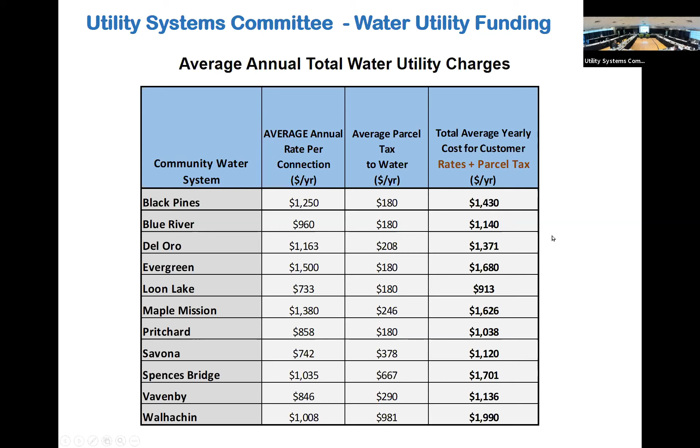Again, this is average, and if there's debt being paid on a capital improvement on a system, and some homeowners have commuted that debt, they may be paying less. So this again is the average. And so when we look at the average for each system, you can see we charge quite a lot here on all these small systems. And these tables are sometimes hard to read.

So I have this same data here in a graph, and Director Quinn, I think you had asked earlier about Blue River. The average customer, when including parcel taxes, is between 1,100 and 1,200 a year. You're welcome. So if we look at the average across all our systems, we're just looking at an average of an average here. We're charging customers, combining the quarterly rates and the parcel taxes, about $1,380 a year for water.

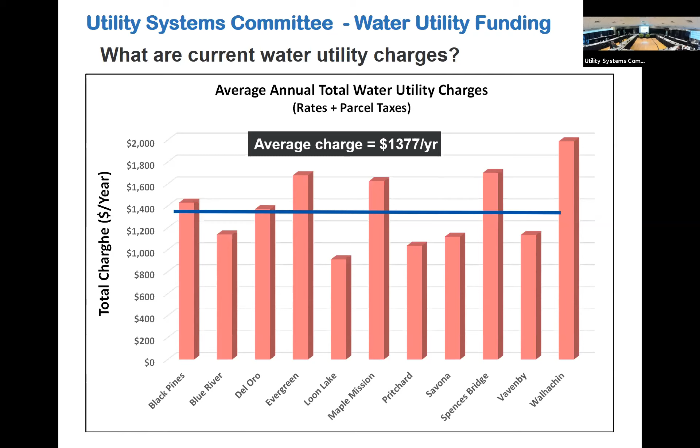So a big part of this work that we've been spending time on is figuring out how much revenue these systems really should have. And so the work has been based on two major inputs. One is some excellent research that I've mentioned at a previous meeting that came out of Calgary, and they looked at small water systems across the country and what kind of funding is required to construct, maintain and operate these systems sustainably.

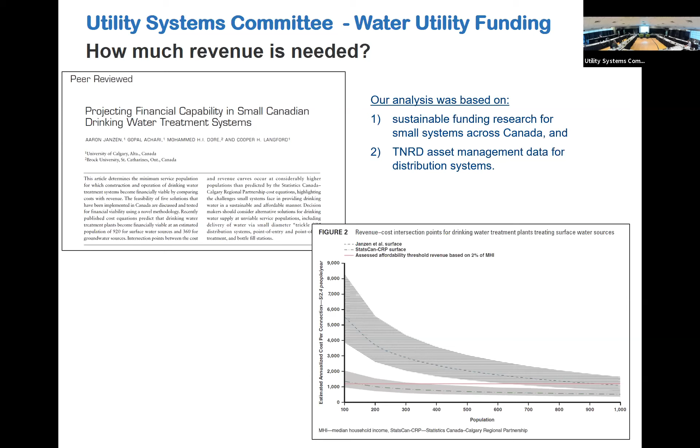We also utilized our TNRD asset management information for the distribution system because this research did not include distribution systems. So we added that in and combined the two together to look at the amount of revenue we should ideally be generating for our 11 water systems. You may recall this graph. This came out of that research out of Calgary, and I did show you this previously. It essentially shows a couple of key things.

One is that the side of this graph represents the cost per connection for sustainable funding, and this is population across the bottom. And so what it shows you is as you have a larger and larger system, the amount you have to charge per customer decreases because you have the benefit of economy of scale. So the real challenges arise as the systems get smaller and smaller. We kind of know that intuitively, but this research is probably the best available information for Canada in terms of what the true costs are.

And of course, there's a difference between surface water and groundwater. Groundwater often does not require treatment. For example, Blue River, the wells there are excellent quality of water. We're still required to disinfect it, but there's no requirement to filter that groundwater on that system. Sometimes it may require filtering. Surface water essentially always requires filtration to meet 4-3-2-1-0 drinking water guidelines. So this is a big part of the research that we've used.

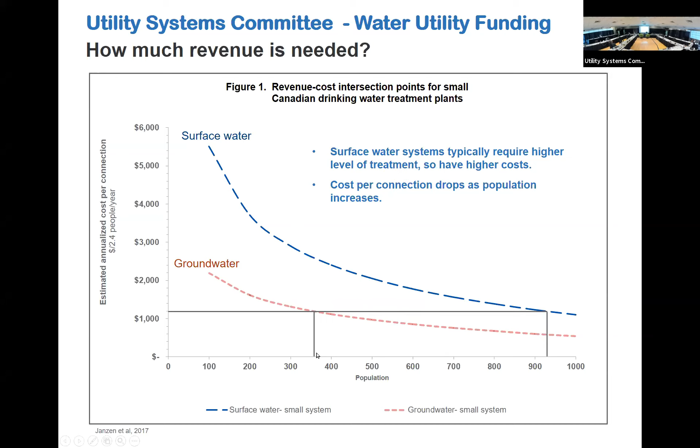And what I've done is I've reverse engineered this essentially. The primary output from the research was to determine minimum service populations required for sustainable funding. As I pointed out in a previous meeting, none of our systems are large enough to have enough customers to generate sustainable revenue. So I reverse engineered it, and I looked at the required revenue on each system per year for sustainable operation, and that's essentially the output here. And I don't want to get into the details of individual systems. Really, what I'm trying to do here is look at the utilities service as a whole.

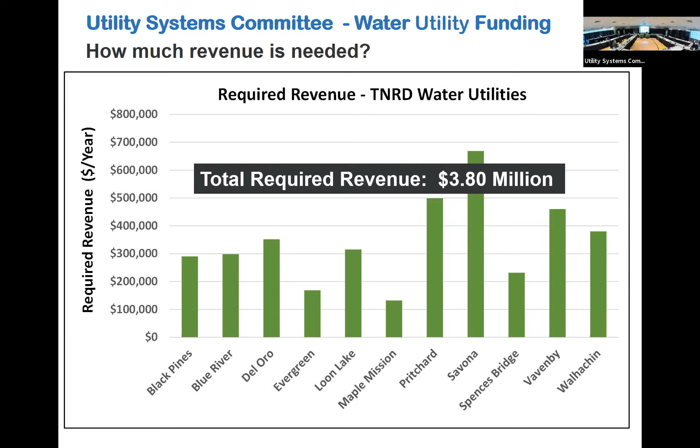And the total required revenue based on the research and our asset management information for our distribution system works out to 3.8 million a year. So current revenues are about 1.3, required revenues based on this analysis about 3.8. So there's a huge funding gap here on our utilities.

So what we did was we said, well, what if we make assumptions about how much of our capital costs can be offset by these grant programs? Now, I just want to point out this 3.8 million contains both capital and operation and maintenance costs. So it's the whole basket. Now, recognizing that the grant programs help offset capital only, they don't help us at all in terms of operation. We basically did two scenarios.

One, we assumed, what if 60% of our capital costs are covered either through Canada Community Building Fund or grants or that sort of thing. That drops what our required revenue from our customers should be to about 2.48 million. Additionally, we said, well, what if we are highly successful and we are covering 80% of our capital costs through gas tax or CCBF and grants, and that drops the required revenue to 2 million.

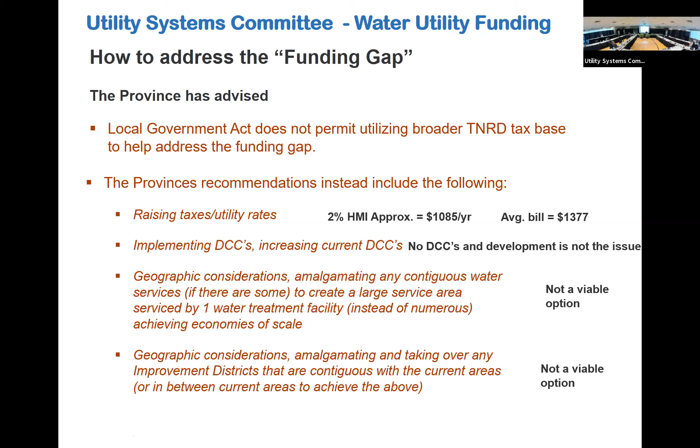And so we said, well, we've got to go back and talk to them and explain to them that we're still in a quandary here. What does the province recommend? Scott was very helpful in arranging a discussion with the Ministry of Municipal Affairs. And we basically told them what I'm telling you now, and talked about the funding gap.

We said none of the recommendations from the province really are viable. So in lieu of that, what's the recommendation? And our concern really here is public health and safety. That's what's really driving our work here, to make sure we have enough money to make systems meet 4-3-2-1-0, right?

So Director Gillis has an incredible question, he tells me. It probably is an incredible question, but looking at the cost of operating that Del Oro system, has any thought been given to simply buying water from the City of Kamloops because of the proximity?

Yes, that has been raised, and when we undertook our master plans for all our water systems, that was one of the items that the consultant brought forward. By coincidence, I worked 13 years at the City of Kamloops with a primary focus on water distribution. I'm intimately familiar with the City of Kamloops water distribution system and the challenges: first of all, to convince council to extend the water system beyond city limits, then the cost to upgrade this water system, because the upgrade would commence down on River Street,

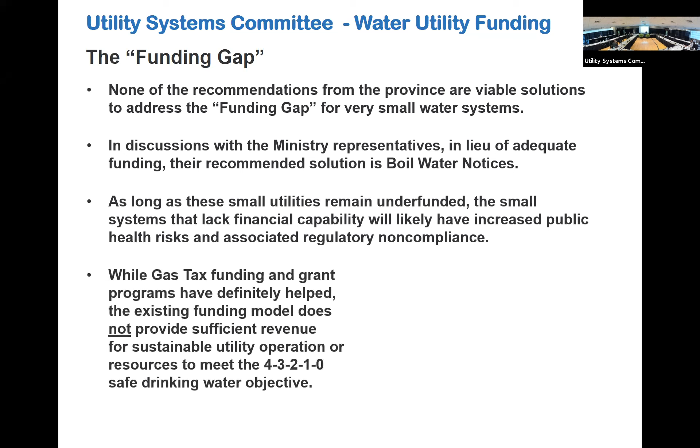Director Rice has a question. Just a quick one. It doesn't make sense to me. Their solution is boil water alert notices? That doesn't even address funding. So that's not really a solution to the problem, is it? You're bang on, Director Rice. Essentially where we're at right now is kind of a dead end. We're not saying we can't find another path forward, but as of today, we don't have a solution or a recommendation to bring forward.

But as I mentioned, we haven't had as much time to work on this over the last 6 months as we had hoped. We're still trying to figure out what options are on the table within the constraints of the legislation. One of the things that came up from the Ministry of Municipal Affairs, when I pointed out there are lots of costs we incur that are not eligible under the grant programs because they don't meet their criteria, is they did open the door a little bit. They said, send us some information about these costs, and maybe we can look at providing a little more wiggle room in terms of what's eligible and what is not.

And here's a really good example of a real issue that we have to address. The Evergreen water system that we talked about earlier, the intake of that system is down by the river, of course. And to get there, you have to drive a long way through a piece of private property. There currently is no right of way through that property. We've been working for quite a while with the landowner to get him to issue us a right of way. We're not getting a lot of cooperation. So there's a good chance we're going to have to go down the route of expropriation. That costs money: surveying, legal, all kinds of other costs associated with trying to expropriate property.

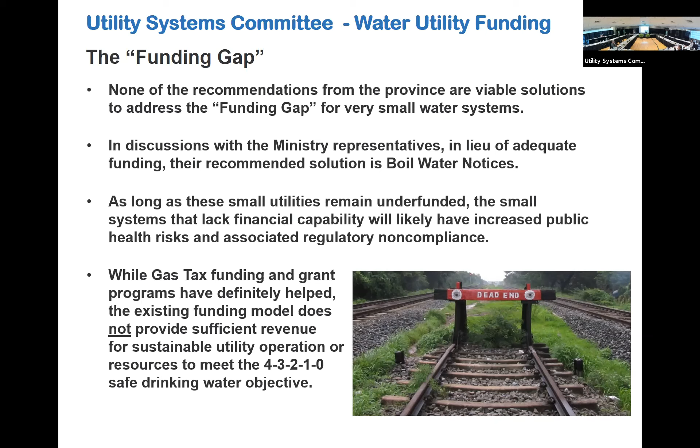Director Quinn. Mr. Devlin, do the ministry people actually suggest boil water advisories? Did they actually suggest that to your face? Yeah, my argument to them was, the legislation doesn't differentiate between a service like a water system or a service for, say, a local transfer station that is being funded by the customers.

And my argument to them was the problem here is that, first off, they don't differentiate between a small water system and what I call a very small water system. Because they classify a small water system as under 500 customers, our real issue here is 7 of our systems have an average of 39 customers amongst those 7. So these are very small.

My argument to them was, if you're an engineer and you're designing a road system, you have what's called a level of service, and you accept that, say, during rush hour, there may be more traffic on that engineered system than it can handle, and you can end up with a traffic jam. So in a way, it's designed so that there are times that it fails. Water systems, though, when we're talking public health and safety, in my mind at least, are a completely different situation, because we shouldn't be designing water systems to operate most of the time but fail other times.